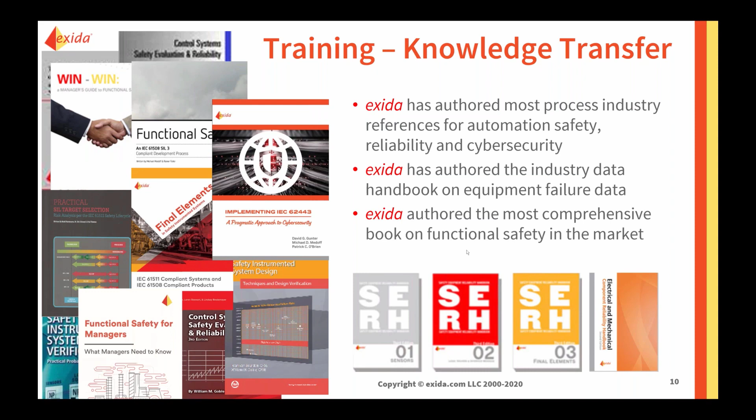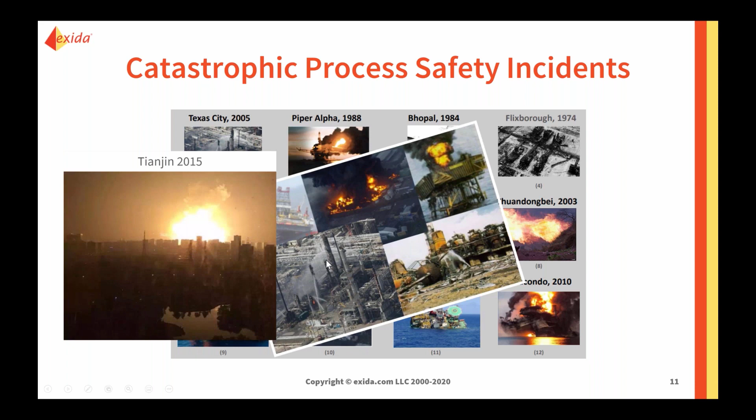We've got a very poor track record when it comes to safety in the process industry. Approximately every 18 months we have a catastrophic event with the deaths of many people who come to work and don't make it home at the end of the day. And that's a terrible burden we bear in the world of safety. You probably remember the social media videos of Tianjin. That was in 2015, and most recently Beirut had this catastrophic explosion next to the port area there. These are failures of the process industry when it comes to safety. And if history is to be believed, then robotics won't be any different from that, and we have the potential to cause lots of harm.

Automotive isn't immune from this kind of thing. Toyota had to pay just over $1 billion because of a case of unintended self-acceleration. Typically, the argument would be that the driver was not paying attention or chose to press the wrong pedal. But of course, as more and more drivers started to suffer this problem, people realized that it might be something more fundamentally wrong with the vehicle.

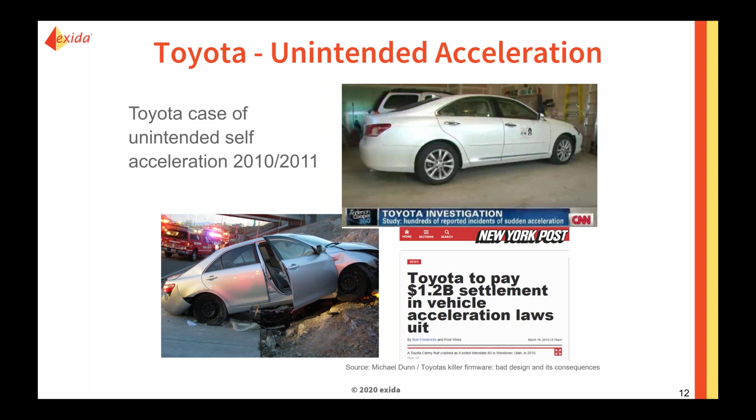And crucially in this case, from a software engineering point of view, a bug was not found by the plaintiff. They didn't review the code and say, here's a flaw. They simply looked at the work that had been done by Toyota, and they made the argument that the code was of insufficient quality, so there must be a bug present. And there was a fine and a fair amount of work for exida when we were asked by Toyota to come and assist them with the actions to deal with that lawsuit and the effects of that in their organization.

Tesla had a problem with batteries. This was something that we ended up working with the battery supplier on. Happy to say that problem's been largely resolved. And you might remember that Takata went out of business. Here are the three guys testifying in front of the US Congress. They filed for bankruptcy, and not only were there several fatalities all over the world, but there was a significant impact to the supply chain as automotive OEMs had to find an alternate airbag supplier.

Uber had a high-profile incident with their software set to ignore objects on the road, and you might remember Knightscope here, a robot that decided to commit suicide. I don't know what the word for robot suicide is. Roboticide, maybe. But obviously, they'd not anticipated the use in the shopping mall with the steps down to the pool, and it had gone and taken a tumble there.

Airline industry, these are things you can look at in your leisure on Wikipedia. The turbofan there was due to impurities in the metal, and it ruptured all 3 hydraulic systems, resulting in 111 deaths. And you'd think that with 3 hydraulic systems we had sufficient redundancy. Well, of course, if you have a single point of failure which ruptures all 3 simultaneously, you've defeated your reliability. The Ariane had a number of problems in their inertial navigation. That was a fairly significant loss, and the explosion there.

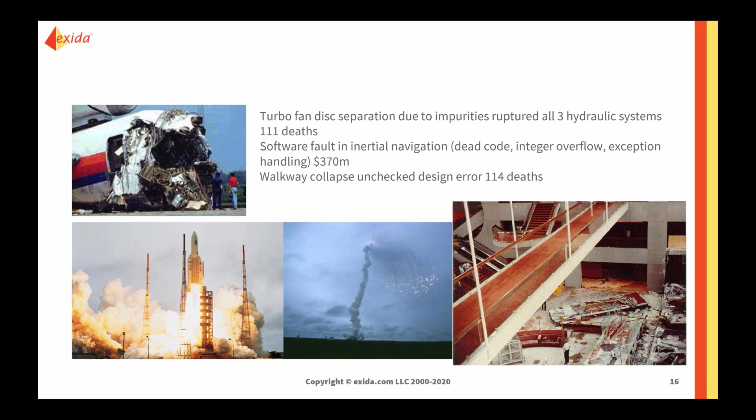And we make mistakes with mechanical design as well. Have a Google for the Hyatt walkway collapse, an unchecked design, a schoolboy error in the assembly, 114 deaths as a result of that as the platform collapsed on the people below.

What do all these things have in common then? Well, somebody went to hospital, and in many cases the organization responsible had their reputation damaged. If you think of a hospital as a general purpose system for resolving the effects of harm, sometimes they're successful, and you go into hospital and you come out in better shape than you went in. And of course, there are people who don't make it out of hospital because they die. So hospital is very good at dealing with many of the reasons that we get hurt.

And of course, electronics and engineering systems, we are steadily finding more and more ways that we can hurt people. And the reason we hurt people is because the products were launched with missing features, or because the failure rate was unacceptably high. Or we knew there were faults and bugs and defects and opportunities to improve, but we didn't make them. So think about this.

What stops your product launch following this trend? What's stopping your company making a catastrophic error that leads to an event about every 18 months in the world? Does your company launch with missing features, with a failure rate that's too high, with faults and bugs present? And is any of that safety related? And how do you know whether it is safety related?

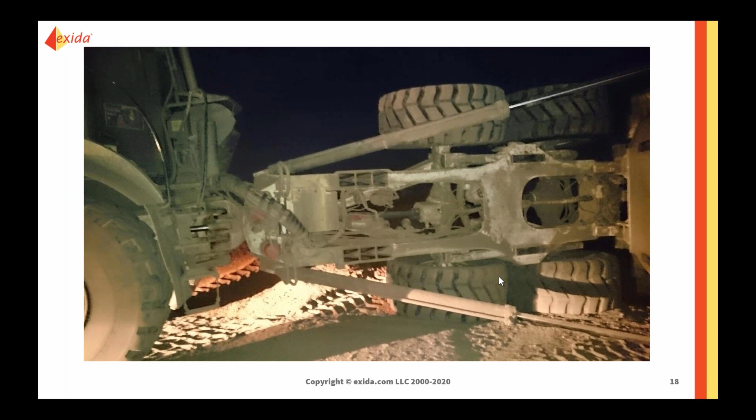Here's some examples from my career. I was fortunate to see the underside of this haul truck here. This haul truck's in Utah. This was in the mine. I wouldn't recommend this as the way to conduct an inspection of the underside of the truck. You can see from these photos what happened.

When these vehicles are modified, the fuel system, the seats, and other critically important safety components of the vehicle will be modified without adequate safety testing. Please get in touch with us to begin your lawsuit against these organizations. So the world of liability is quite challenging. People are out to find products that are unsafe.

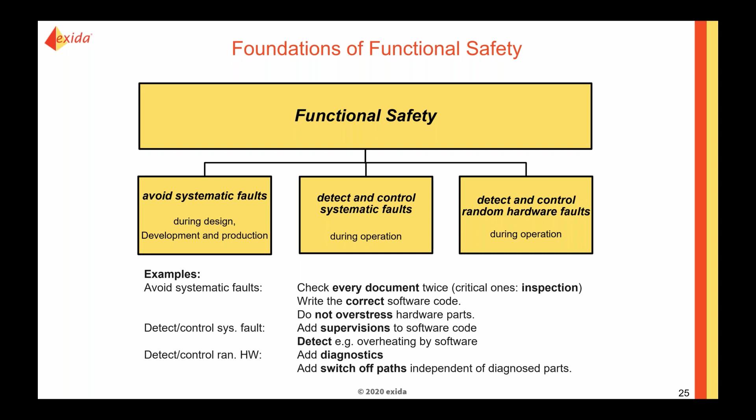So they're the three pillars of functional safety. Avoiding mistakes that we make as humans in our design and development, anticipating them, detecting and controlling them, and anticipating random hardware faults and detecting and controlling them. That represents the state-of-the-art approach today. So what is state-of-the-art? Well, you've got a sliding scale. If you've got old technology and things that have been done before, pretty well you can go and find a standard from the various catalogs, and you're going to find a prescriptive standard that's already been written by people that have done that work, and really all you have to do is pick up the standard and do as you're told.

As you get more complex and you start to get into the realm of things that have never been done before, you're a startup and you're a disruptor, and you're bringing together electronics in a way that's never been done before, you might not find a standard, and you want to work your way down this list. So for the simple stuff, 13849 Part 1 and 2 and RIA have a number of performance-based standards that are helpful for fixed position robots. You get into the realm of PLCs and slightly more complex microcontrollers, you might use 62061.

If you get into complex electronics, then if you're on an automobile, you'll be looking at ISO 26262 and the SOTIF standard 21448. But for everything else, you'll be looking at 61508 for your complex electronics. So if you're using microprocessors with complex programming languages, maybe multiple cores, then 61508 is the right standard for you to be looking at. The other standards don't really help you.

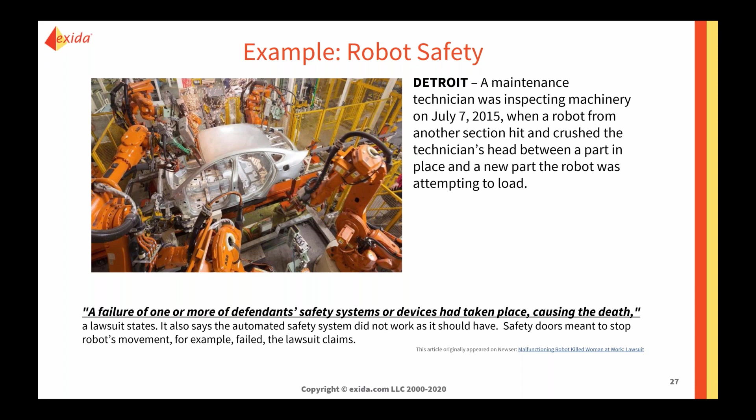Well, in the US, you don't get a lot of guidance in law. The US traditionally has a very low legal requirement for product sales. We know that it is the threat of liability that drives standards and standardization in the US. It's different in different parts of the world. I'd be happy to talk to you if you're in a different part of the world, how it works in your country. But in the US, the legislation is developed at a federal level. Here are the key agencies.

We know that the FCC requires us to do some level of interference testing. Functional safety doesn't really come under the OSHA area, but it's about the closest we might get. So if we're going to do something in the case of the US, it's not going to be the law that's going to demand that. It's going to be the threat of litigation that requires us to use state of the art. Functional safety is not the same as OSHA. A lot of people new to functional safety, particularly in robotics, get confused by this. OSHA is concerned with the health of people in the workplace.

So there's this nice balance between what employers must do, what your company must do, and what you must do legally when you start working for a company. So your employer has got to provide you with a safe place to work, not ask you to do something that's unsafe, give you the protective equipment that you need to do the tasks, and they've got to allow you to report concerns, and crucially, without fear of losing your job or being punished for that. There can be no recourse for reporting concerns.

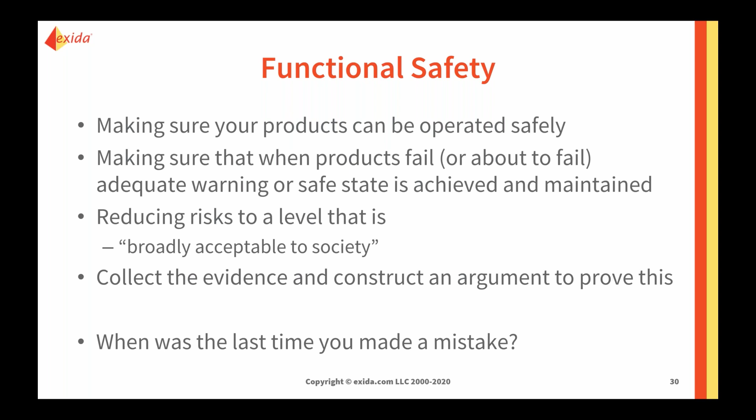And again, that is not a very engineering definition. Broadly acceptable to society is not a constant. There is no equation for that. So we have to collect the evidence and construct an argument to prove all of this. And what I'd ask you to think about: when was the last time you made a mistake? And hopefully everyone's humble enough to realize that we make mistakes all the time. And so we should plan for that and include that in our safety culture.

We have a technical definition of risk. This is in a standard called ISO 12100. And we're expected to look at the hazards that we might cause in the use of our product. And we're expected to assess it on a scale of severity and a scale of probability that the hazardous situation might arise. So we might say the severity is in the middle there, and that there's a probability of the hazard being present and someone being exposed to it. And what we might find is that point there is above the tolerable risk margin, and that we can't accept that risk for our product.

So that means we have to reduce that risk with things like separation controls maybe, or training, or labeling, depending on the risk. But we still may not achieve enough risk reduction, and typically in robotics that's the case, and we have to add additional risk reduction, which is going to be the responsibility of our electronics. And the amount of risk reduction we need to get lower than the tolerable risk is measured on a scale, either a safety integrity level or an automotive safety integrity level, and that tells us how much risk reduction we need and how much rigor we need in our process.

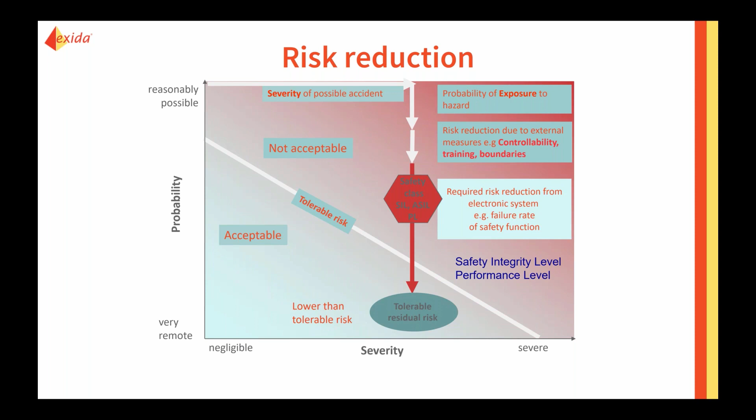A stab to the heart, that would be quite severe, but the probability of that's probably quite low. To contrast that with that same knife cutting you 1,000 times, well, a single cut is fairly negligible, but by the time you've had 1,000 cuts, you're probably going to be suffering, and you might even die from that. So you might have death by 1,000 cuts on the top left there. So that's risk reduction in a nutshell.

So what does the safety integrity level mean? Well, it's got implications for the systematic capability. So the things that we do in our design process need a level of rigor. The higher the SIL is on a scale of 1 to 4, the more rigor is needed. So if you're a SIL 4 risk, then you need more rigorous methods than a SIL 1 risk. And that's nice, because what that says is we don't need to do the most difficult, most time-consuming, painstaking engineering on everything. We can scale the effort that we put into safety to the level of risk and have a response that's commensurate to that.

And the methods in the systematic capability guidance are wide-ranging. They may range from single decisions, which you can make immediately, things like the programming language that you're going to use. They may be individual activities, things you're responsible for, your own competence, things like that. They may be activities that require a sustained team effort, and there are methods for systematic capability that require specialist knowledge and specialist tasks. Tasks using methods and principles that maybe your team, maybe your company doesn't have experience with.

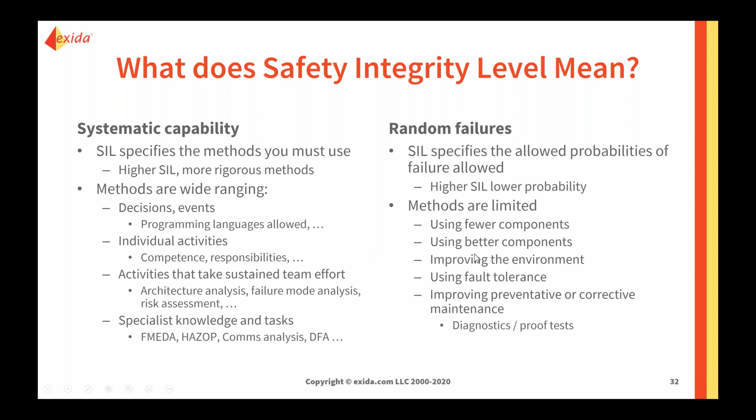Typically, we want to be using fewer components for the safety system, using better components that are over-engineered, improving the environment. We might use redundancy and fault tolerance, and we're certainly going to be doing things like diagnostics and preventative and corrective maintenance. These are techniques we use to reduce the random failures of our parts. So they're complex in their own right, but the methods for the random failures are fewer than the methods for the systematic capability, as you'd expect.

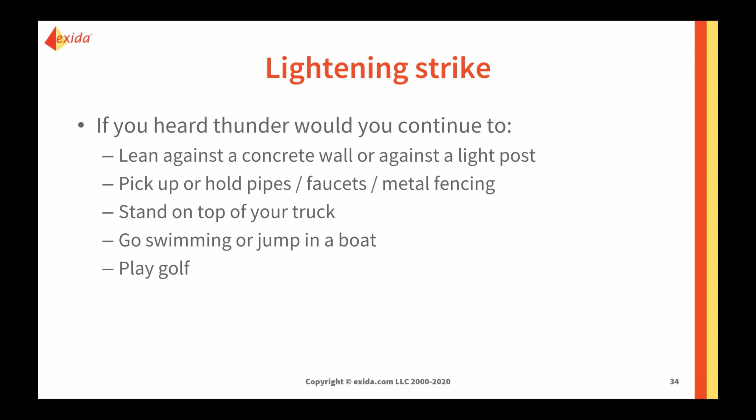And is that reasonable? Well, if you heard thunder, would you continue to lean against a concrete wall or against a light post? So even if it's a concrete light post, likely it's got a metal reinforced rod down the middle of it. Would you pick up a pipe or a tap or a faucet, or go and stand next to some metal fencing? Would you go and stand on top of your truck? Would you go swimming or jump in a boat quickly if you heard thunder? Would you carry on playing golf? Would you fly a kite like our friend Mr. Franklin here was lucky to survive? More than likely you wouldn't.

If you heard thunder, you would look at your smartphone to see what was going on, but you would seek cover, because the consequences of being hit by lightning are fairly severe, and it's very easy to avoid that by going indoors. So that's roughly where that level of risk comes from as a society. Obviously, we as a society can change our level of risk. We might find this new generation is more risk-taking than us, and maybe they will go and stand outside in the thunder. I don't know. But the goal is to reduce the level of risk to a level that society considers acceptable.

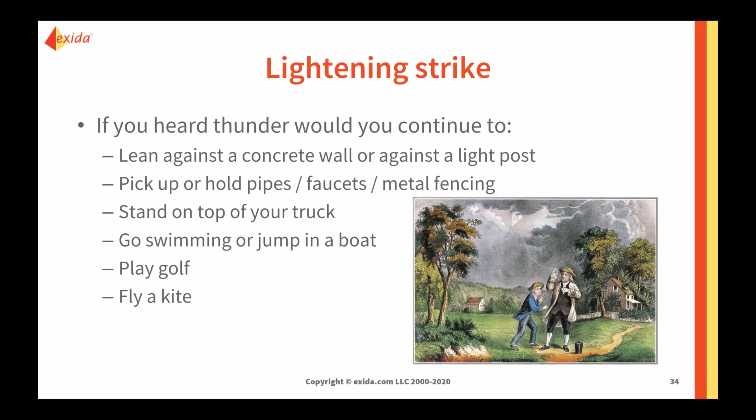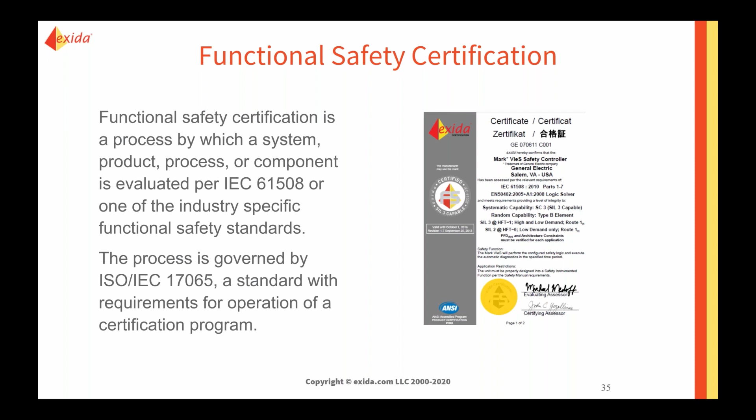And to prove that, you might come to an organisation like Exida to get a certificate. This is a third-party attestation that you've done the activities necessary to prove that your design is sufficiently safe. And we are governed by an ISO IEC standard that has requirements placed on us as a body that operates a certification program. And it means we get a certificate from ANSI every year after an audit, and we have to maintain this if we want to be a certification body.

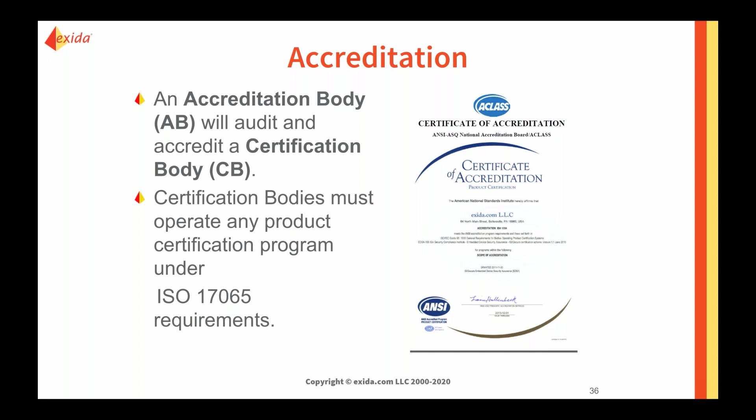And as part of that process, the certification body, Exida, must use a scheme, and the scheme is what we use to detail all of the certification requirements, including the interpretation of standards. Problem with standards is they're a snapshot at a point in time, and as the standard gets older and older, state of the art changes and deviates from the standard. And oftentimes we find that the standard is wrong. There are errors in the standard. There are mistakes in the standard.

And at Exida, we publish our scheme and our interpretation up front, so you can see that. And where we disagree with the standard, or where we think the standard is wrong, we subject ourselves to a requirement that we publish our position, our interpretation in 2 reputable journals which are peer-reviewed. And again, all of that information is on our website. You can see the parts of the standard, how we interpret it, and where we deviate from the standard because it's wrong. We've learned since that the standard is inadequate.

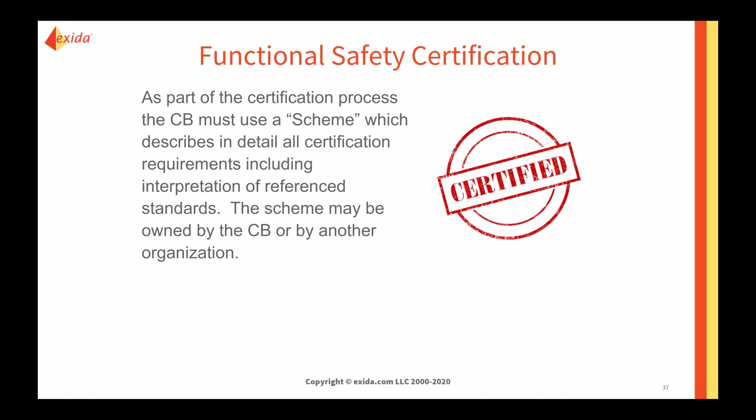So it's well known then that the exida scheme has added requirements beyond what's required in the standard. We have over 350 billion operating hours of field failure data with which to identify the failure rates and the failure modes of all of the components that you'll be using in your robotics projects. Typically, the manufacturers of those components will have worked with us for some time before you decide to use them. And we publish the failure rates, not just the PFD average.

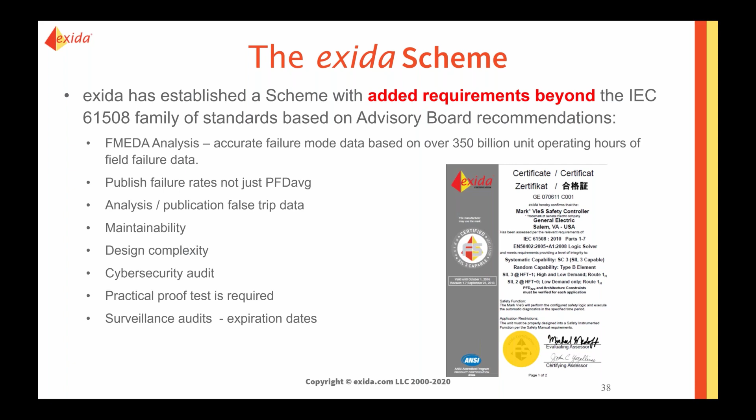We do analysis of their field failure data to confirm our failure rates. And there's a number of other activities we perform with the owners of these components to make sure that we understand them fully when it comes to using them in your robotics projects. And it's well known that the exida scheme has the toughest technical requirements of any certification body. And of course, that's what people want in the world of safety. They don't want a wishy-washy certification. They want to be held to the highest standard because we're talking about people's lives.

Here's how a project might work. In principle, all you need to do is submit your safety case. We audit that, check the requirements are met, and issue a certificate. But typically, you need some help developing the safety case. So we start out with a gap analysis. That might require some training. The gap analysis takes a day or two, and we can give you a good indication of what it's going to take to certify your project.

So typically in a robotics project, you might have a few hundred hazards. I've done many of these, and I think there was a project where we had 550 hazards that were analysed. But typically that boils down to about a few hundred mitigations. 50 of those might be complex electronics, and we might have 10 safety goals associated with that. And typically in robotics, we'll get a remote e-stop safety goal. We're not sat on the machine or near it, so we need to have a remote capability to stop it.

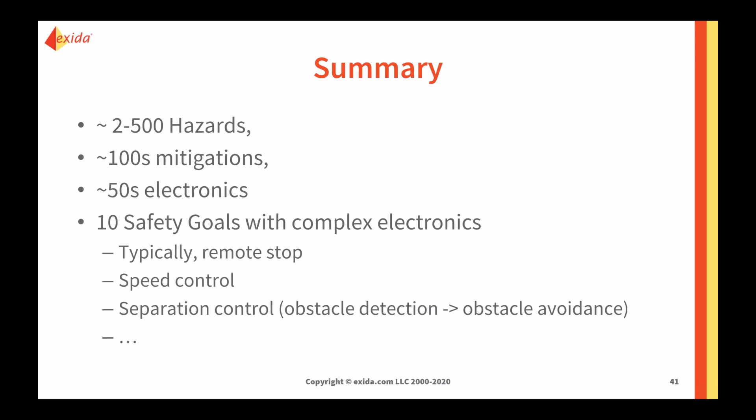More than likely there'll be some speed control safety goals, and if the machine is moving near to people, then we might need to deal with separation controls, and that could be as simple as obstacle detection, but it might also be obstacle avoidance, which gets a little bit more complicated, of course. And then after that, the safety goals become very product specific. So I need to know whether you're high speed and high energy or low speed, and whether you're operating among the general public or in an industrial environment. But that's a typical outcome of the hazard analysis. And each of those safety goals, of course, will attract a safety integrity level, and from there, the rigor and the methods need to be applied.

So what can you do? Well, you can put a tick next to taking the time to inform yourself. It's a good idea to come and listen to this seminar. What I'd suggest you do is start asking more questions. So contact me. By all means, find out whether there is a safety team in your organization. You might find there are some people who have been through this previously in your own organization. But if not, reach out and ask your questions. Think about the hazards and the mitigations, look at the test results for your product yourself, and inform yourself what are the dangerous failure modes of your product.

If you are working in a safety-related environment, then you should be following a procedure in everything you do related to safety. And if there isn't a documented process for the work you're doing, then you might want to raise your hand and suggest that one gets created, or help create one yourself. Share your concerns, document the resolution to those concerns. That's crucial. And you might consider getting a professional certification from exida.

So we offer a certified functional safety accreditation. You can apply for that and take the exam and call yourself a functional safety expert. Other things you can do is join your professional societies. And if there isn't a professional society for your particular product space, consider starting a trade group with your competitors.

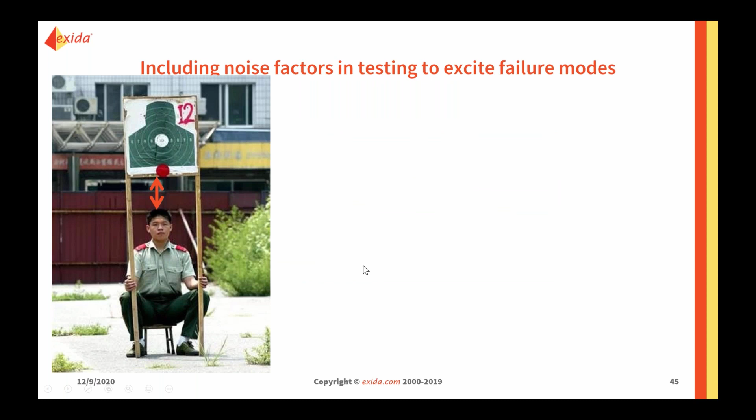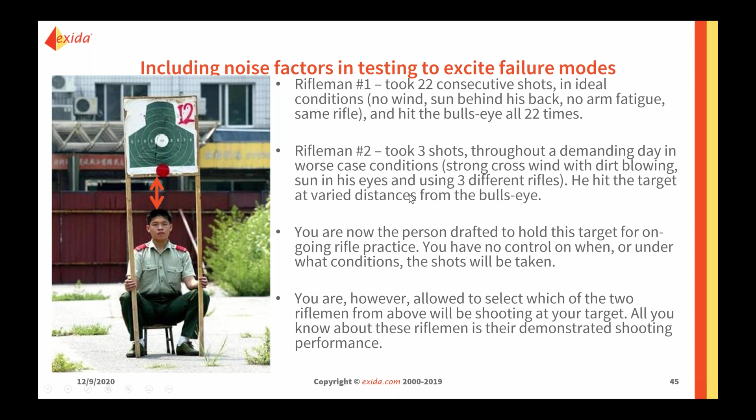So back to our friend in, I think it's North Korea. Rifleman 1, Rifleman number 2, you've got to hold the target. Which one are you going to pick? The vast majority of management pick number 1. And there are a handful of engineers that recognize that Rifleman 2 is the one that you want. Because at least you know that Rifleman 2 can deal with these conditions. You have no information about Rifleman 1.

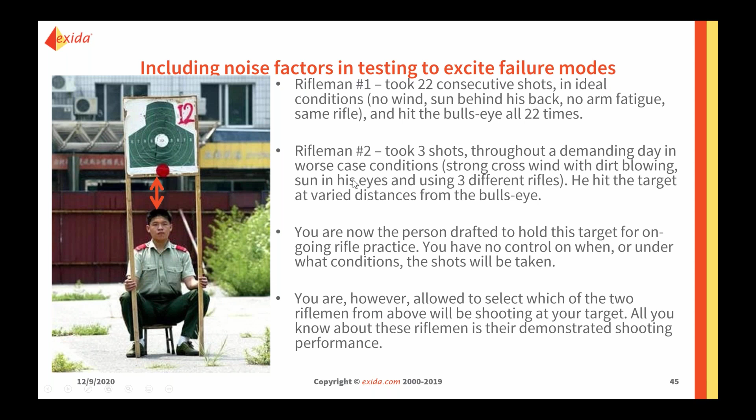And so you've no idea what will happen to that rifleman when you're under the target, when the wind might be blowing and the sun might be in their eyes. So in all cases, it's much better to pick the design that has been tested and stressed with representative disturbances, even if the sample size is a lot less. The point is that the confidence in your data is not a function of sample size. It's a function of noise factors.